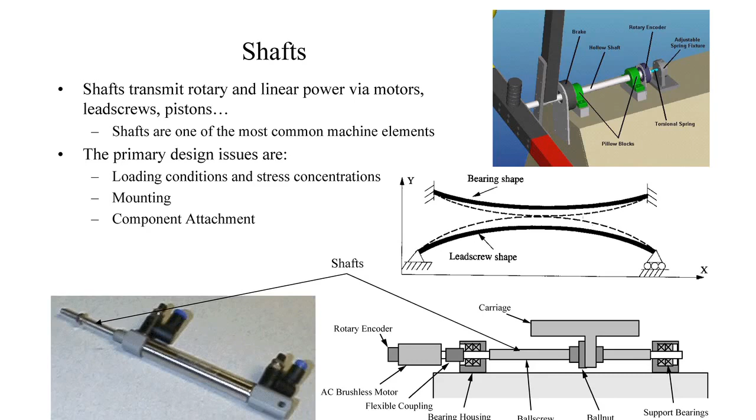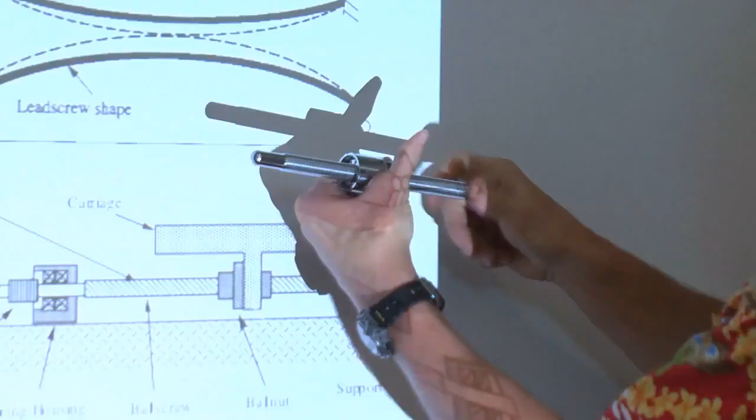Shafting includes smooth shafts, like for a bearing rail, and the shaft of the lead screw itself, but this is actually a roller screw. So basically, a shaft is generally something round. It can be octagonal, it can be square, but usually round because it fits through some sort of rotary motion bearing or linear motion bearing.

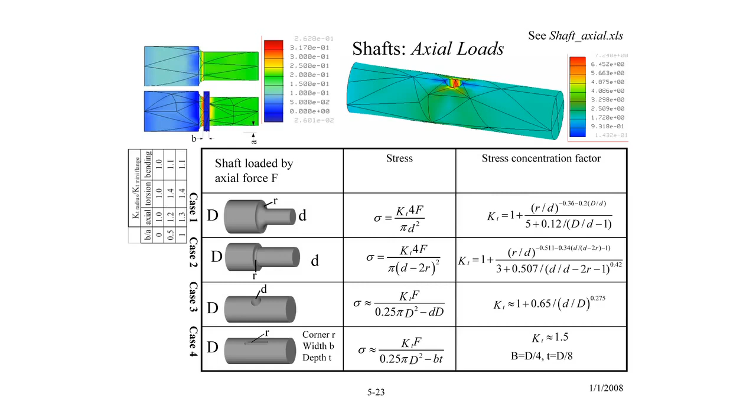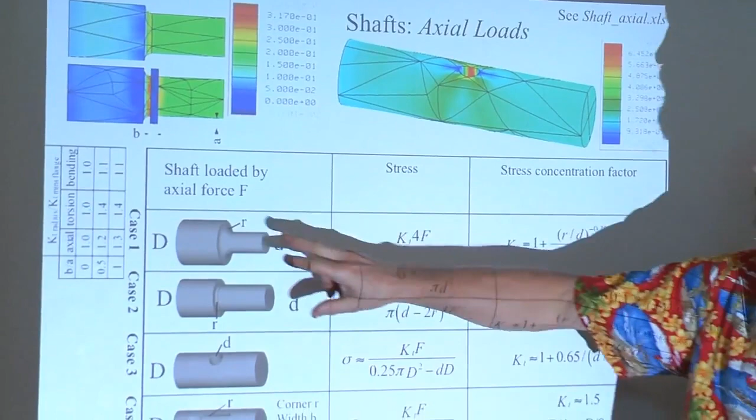Shafts are loaded in various ways: axially, torsionally, or in bending. Those are the three components. Shafts normally have different diameters along their length according to the different functions they're performing.

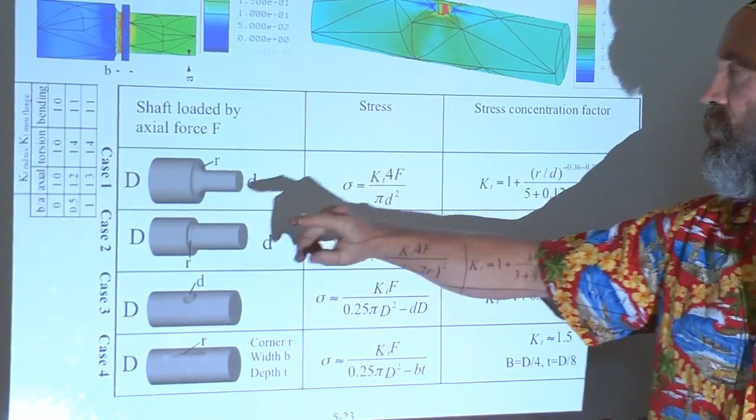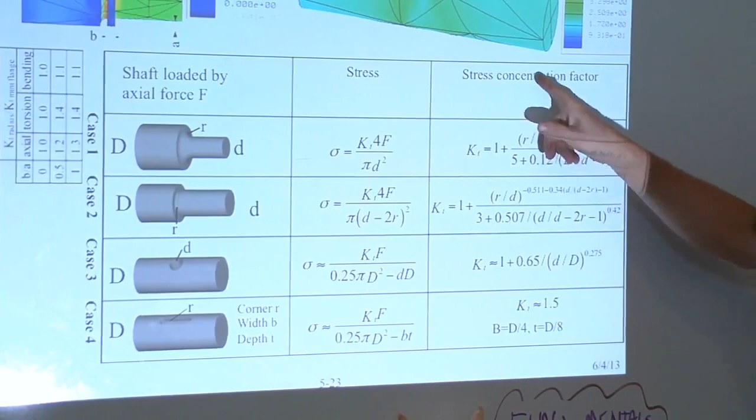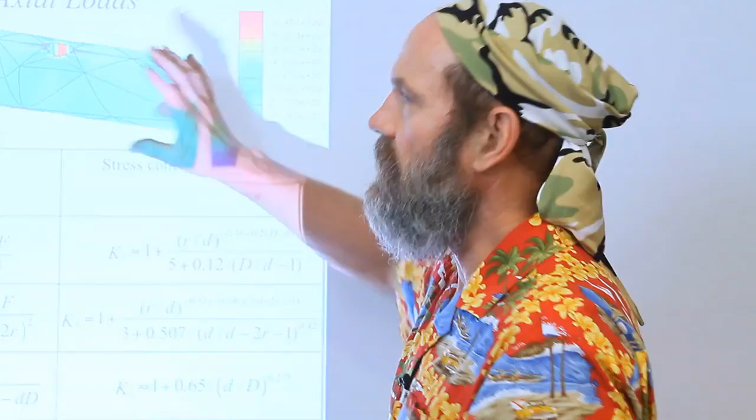It's the transition between diameters, or the inclusion of features like a hole for a pin or a keyway, that may seem very simple but can lead to very high stress concentrations. Remember, to design machines you should have a good class in stress analysis, mechanics, theory of elasticity, understanding how applying stresses to things causes them to break. But very importantly, be able to visualize: I'm putting stress into something, and the stress is flowing in the object, and it hits a hole. It's got to stop and go around the hole, and that's uncomfortable. That leads to stress concentrations.

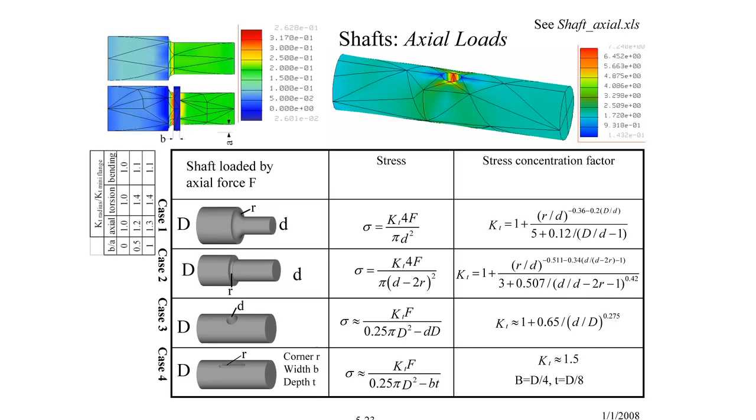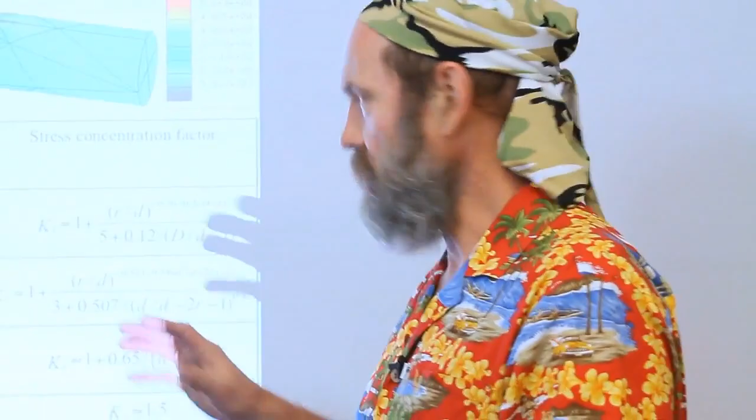This is the finite element analysis output. Here are some stress concentration factors you can write right into a spreadsheet that will allow you to do very rapid design comparisons without having to run and get a proper meshing to do the finite element analysis, because not all finite element analysis programs will be able to handle the transition from a large structure to a very, very fine structure and give you fine enough meshing to give good results.

In general, the key is smooth transitions. Avoid harsh changes, even in things like keyways. It may seem simple to make a keyway in a shaft, cutting it out with a milling cutter. You may think that's very fine, and in most cases it is.

But these sharp edges on the end here, and the sharp edge transition here, can lead to very high stress concentrations. You most typically like to use gentle, rounded edges, although it's very rare you ever see anybody do a rounded key because it's more expensive. But if you really want the ultimate minimum shaft diameter for maximum torque, you wouldn't use a key anyway. But if you were, you'd round that, and back at the end this should also be very gradual. This is called spooning of the keyway.

There are other shapes for transmitting torque with shafts: splines, trilobes. There's a lot of work that's been done over the years to get to shapes that are maximally good at transmitting torque while minimally disruptive in terms of causing stress concentrations.

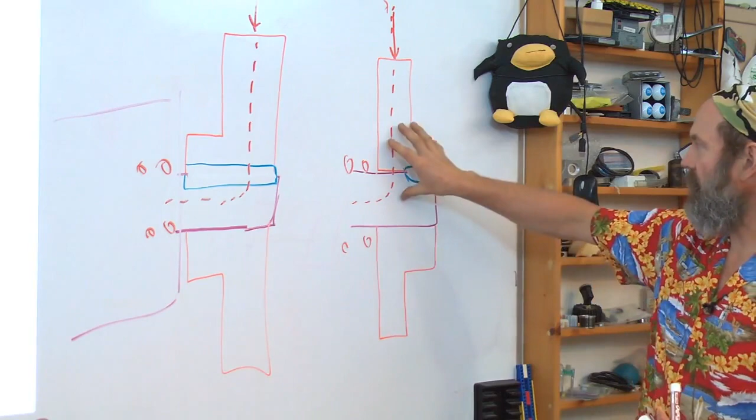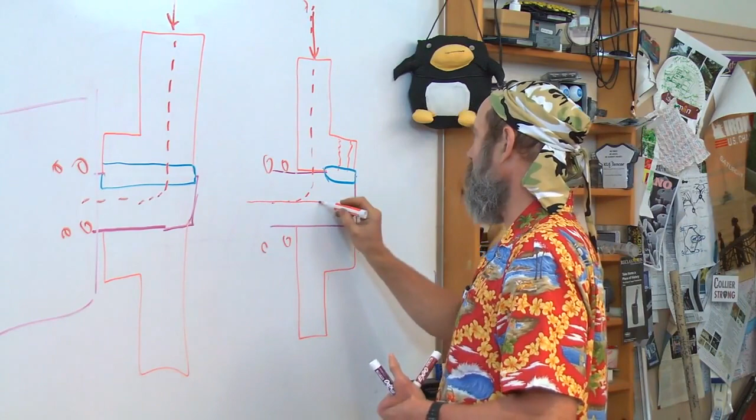Bearings in the shaft. Notice here the function of the shaft to bear the load, smooth path through the structural loop, no stress concentrating keyway features in it back here. The torque is transmitted through the shaft, then comes up through the keyway to be transmitted through the hub to twist whether this is a wheel or a gear.

So I've separated the design parts of the shaft that transmit the bending load from the wheel and the torsional load to the keyway. Back here they're reversed and mixed up, and the torsional load is coming through the shaft while it's being bent, and you get a more complex stress state to cause failure in the shaft.

Very subtle difference. So when you look at a motor output, the hub, you'll usually see the keyway goes all the way back, and it shouldn't. And if you're buying the motor, you should tell them you don't want it that way. This will give you a very robust design.

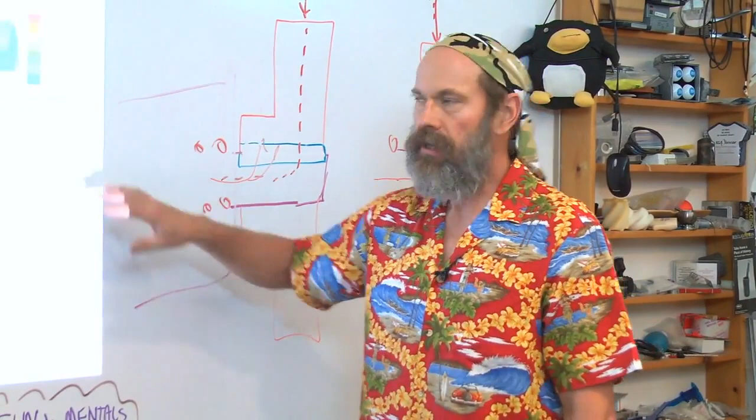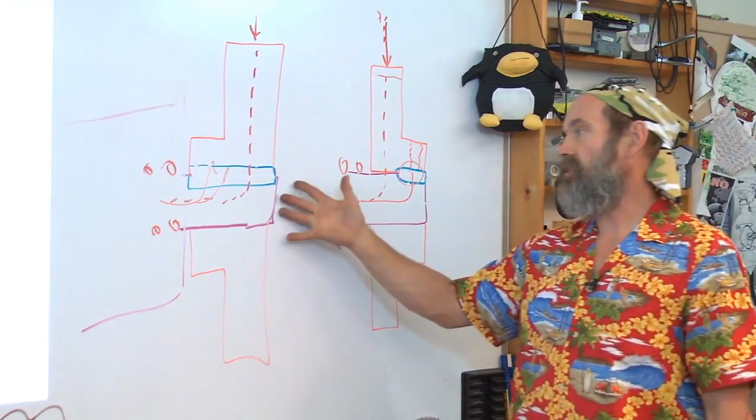So the moral of the story is it's not just that, oh look, I have sophisticated analysis tools. I can run finite elements. I can do the element design on this and show, okay, I have stresses. It's, dude, how do I do a design so I'm not going to have stresses in the first place? Because you may do the analysis and say, oh bummer, it's going to fail. All right, make it bigger, more powerful. Costs money. How do you minimize cost, maximize quality and robustness?

Mounting of the shafts. It's not just that you're going to load the shaft by external loads. When you mount the shaft, let's say this is a linear motion system. Oh, that's wonderful, it slides so nice. Oh, that's really good.

But if it was misaligned because you design the machine and then loads are applied to the machine, and everything has a finite stiffness - I loaded the machine, that's when I tighten this screw here and it bends this a little bit, and this plate looks really strong, but it's misaligned a little bit. Hey, look what happened.

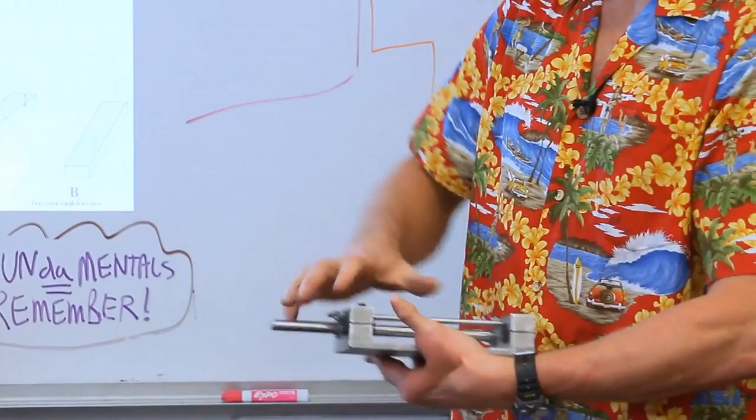What were nice bearings are now, ow, so that doesn't matter, I'll put a bigger motor on, I'll force it. They ain't gonna work so long. The bearings that support the shaft are misaligned.

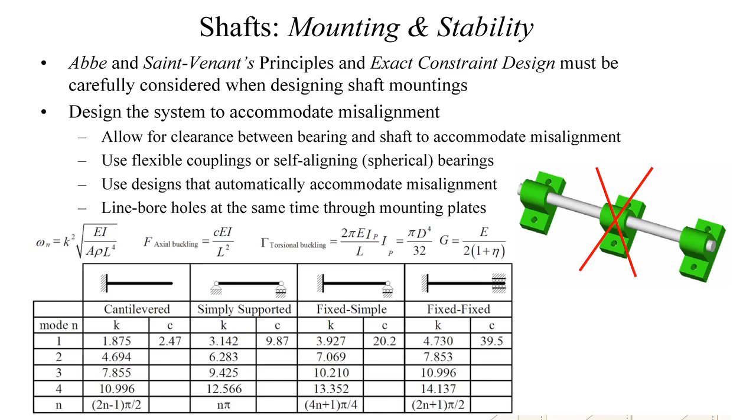Add another bearing in the middle. Use the shaft to keep the bottom from bending. No. So be careful of how many bearings, misalignment of bearings, and you can calculate all this. It's based on clearances and the very simple geometry. You can write your own spreadsheet for this. I bet there's even one that exists in the collection.

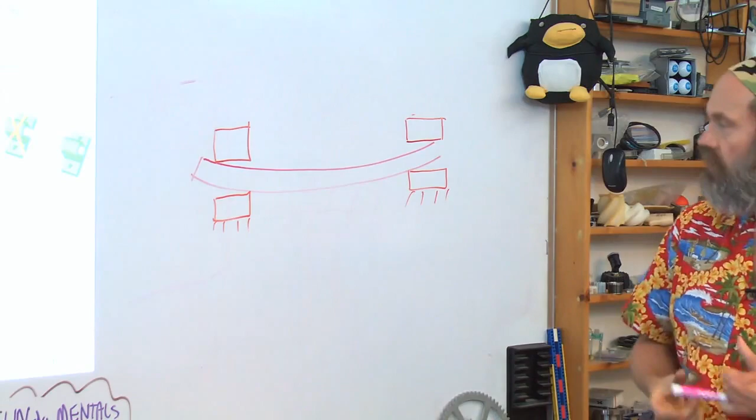The shaft will have some shape because nothing's perfect. How much clearance between the bearings and the shaft is needed such that I do not over-constrain the shaft? Will the shaft, when it bends, cause stress risers on the bearings, where I had calculated the size and strength of my bearings, assuming that I had even pressure across the bearing?

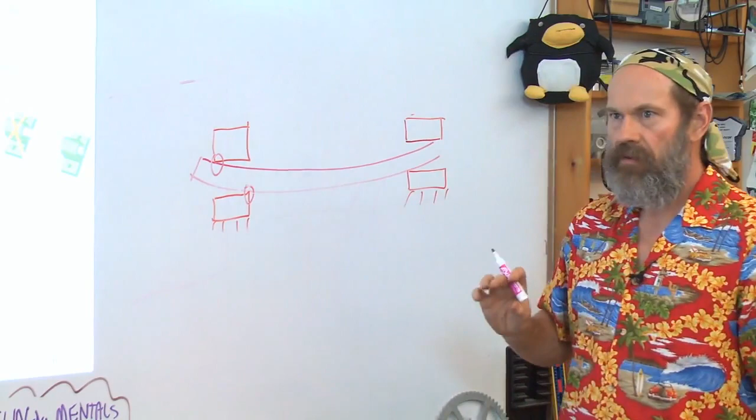Well, it starts to wear here and here. 1 over ouch equals ah. Maybe then the bearings have to be in a spherical seat such that they will rotate and always be aligned with the shaft. Huh, how would that work? I wonder if someone's thought of that before. That's called a self-aligning bearing.

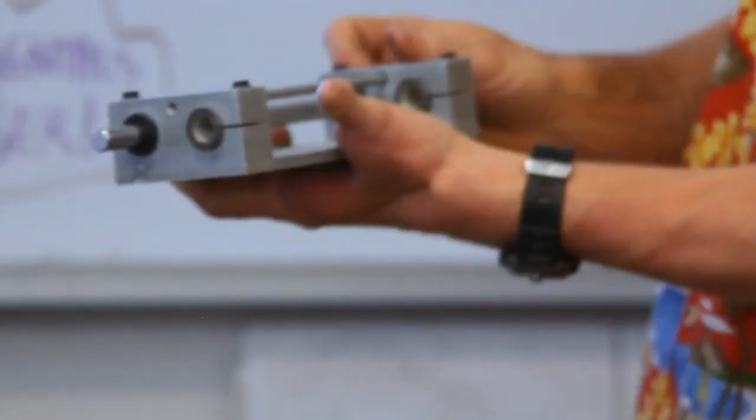Ah, hey, check it out. Why would you ever use these versus these? Some places you want these, some places you want to have just one. And notice it's about 2 shaft diameters, and it will actually support things reasonably well, whereas the self-aligning one gives you way too much wiggle.

But together, 2 self-aligning ones give you all the stiffness you need. Everything has a place, everything has a niche. Your goal is to identify what is the place and niche for things.

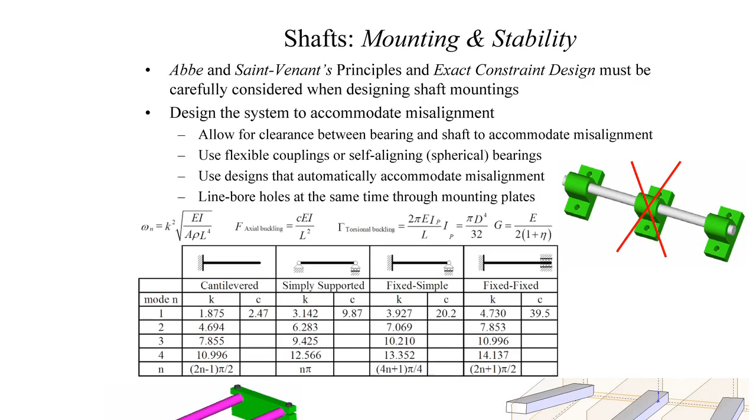Now, this table here calculates for the different types of shaft supports: cantilevered, simply supported, fixed simple, or fixed fixed, which is very difficult to get, how strong the shaft is against buckling. If I push too hard, will it buckle and break?

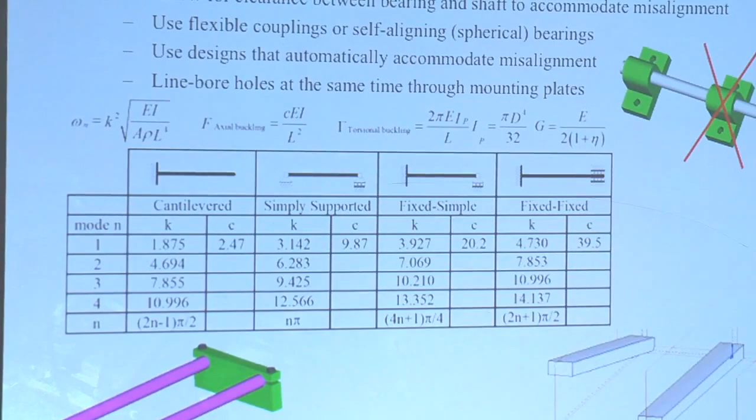I'm not going to use the pen because I'll hurt myself with that. I have just the thing. No, we're not going to use that one, I don't want to break, those are too soft. I guess we will use this guy, this is a piece of plastic. And when I'm pushing on it, it's very strong, but this, if it's off a little bit, that was a buckling instability of sliding away.

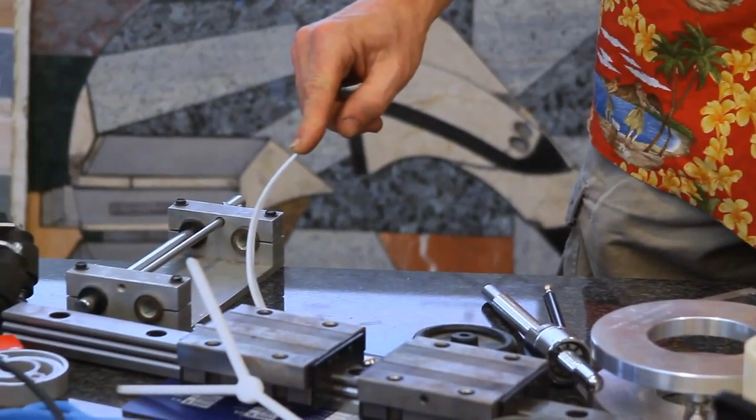Aha, I know how we can cut through this problem. Okay, shaft, pushing on it, oh that's very nice. Push too hard, doink, bends. That's buckling. I let go, it comes back. That's called elastic buckling. You push too hard on something, and...

That's not very repeatable. Boink. That's an inelastic buckling, runs away, instability. It's not just for pushing on it with a force. If I was pushing on this with a force and a shaft in compression, and it was spinning, I can also have a rotational buckling where it starts making an awful noise. Because the slightest little bit of non-straightness, as it starts spinning, the center of mass of the shaft is now off from the center of stiffness, and that's when you get a rotational instability.

So the world of shafts also includes dynamic analysis - very, very important. Alignment of shafts. Shafts can be misaligned this way - that's vertical parallelism. Shafts can be misaligned that way - that's horizontal parallelism, if you're using multiple shafts in your structure.

How do you attach stuff to shafts? Well, we went over the use of keyways, the use of shapes. Do not ever, ever, ever - unless you enjoy paying me exorbitant consulting rates so I can fix your problem and then go scuba diving or skiing more - use a set screw component. Here's the hub, and here's the set screw, whether you're using a set screw to push into the shaft and transmit torque through it.

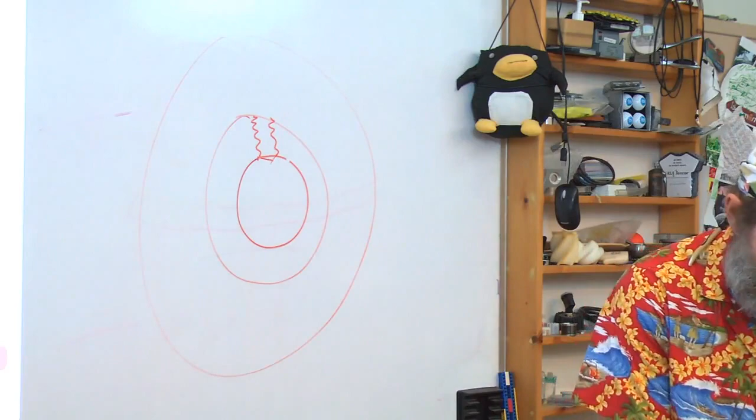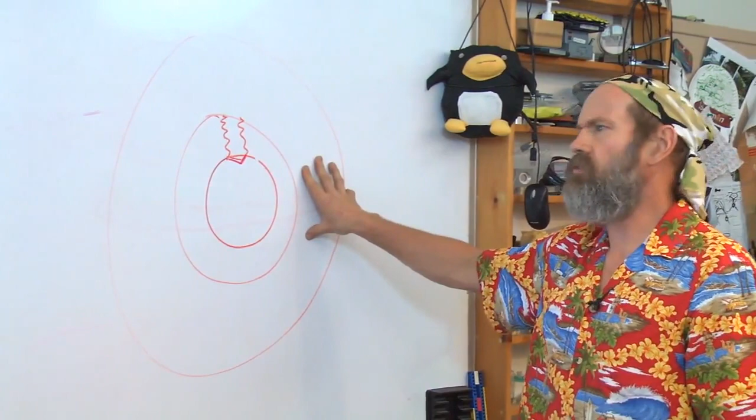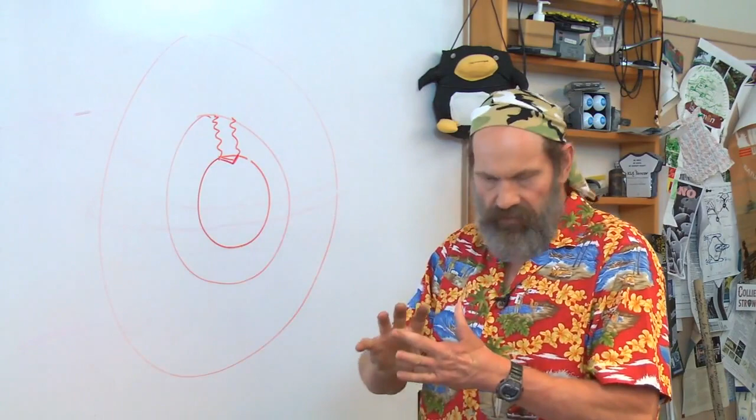So, yeah, but I can buy stuff out of catalogs like this. What do you mean don't do that? Again, if you're designing a cute little machine to do a little demo, that's fine. But on a production machine, what happens is this cup here at the end of the set screw, as you have variations in torque, it starts to work its way loose, and you start to wear, and eventually it will spin out and the wheel will spin free. The purpose of a set screw should only be to keep a key engaged so it doesn't migrate out.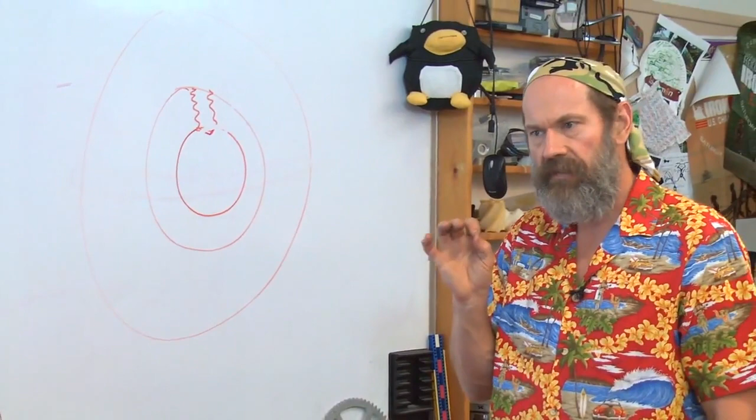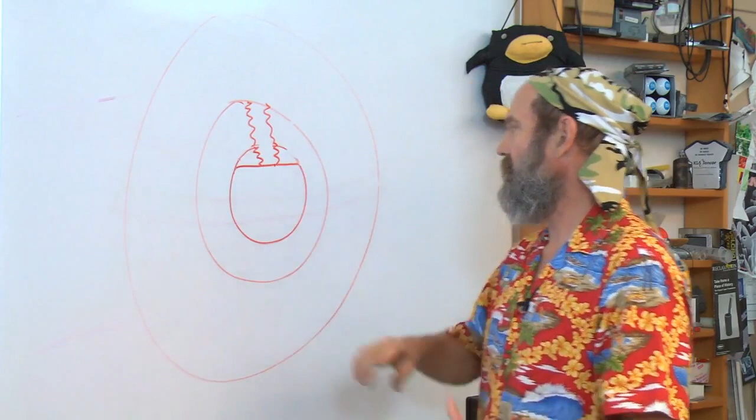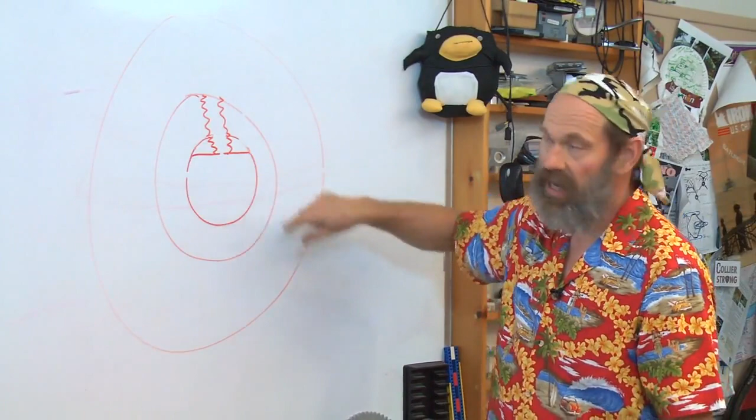Some of the very small components you have in small shafts will sometimes have a set screw that pushes on a flat. And that is a rather lame attempt to try and enable torque transmission, because the contact point is here at a much smaller radius than the radius of the shaft. The idea is that this acts like a wedge, but the problem is the mechanical advantage is in the wrong direction.

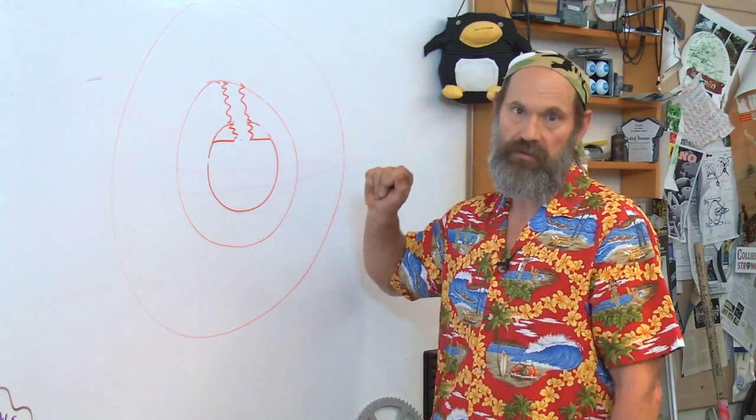So a little bit of torque creates a huge force level on the set screw against the flat, which then more rapidly creates this little wear problem. That wear problem generally leads to early failure here and this thing spinning. So the only time you're justified in using a set screw to a shaft for, quote, torque transmission is never. The only time you would use it is if you're not transmitting torque - all you're doing is going along for the ride, like holding an encoder wheel in place, so there is no load on it other than just the inertia of the wheel. You need to have a positive mechanical engagement.

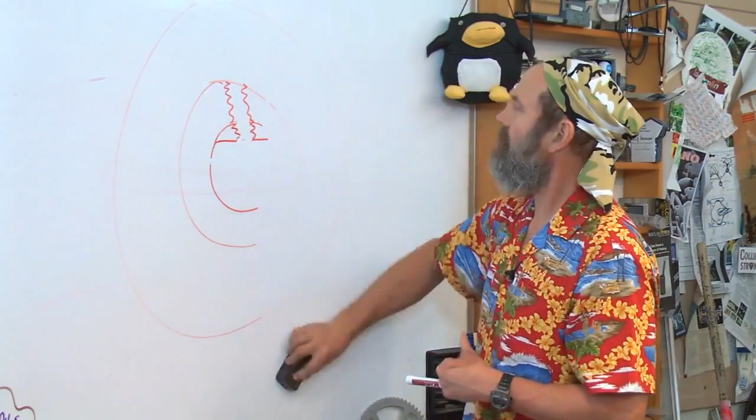Now, one of the opportunities that I've seen that hasn't been taken up on yet, that someone may want to think of one day, is for small motors. The shaft comes out - how do you attach, for example, a pulley to the shaft of a very small motor? Well, there's all kinds of very interesting taper lock flanges for big stuff. Or can there be taper lock flanges for little stuff? A taper lock flange being...

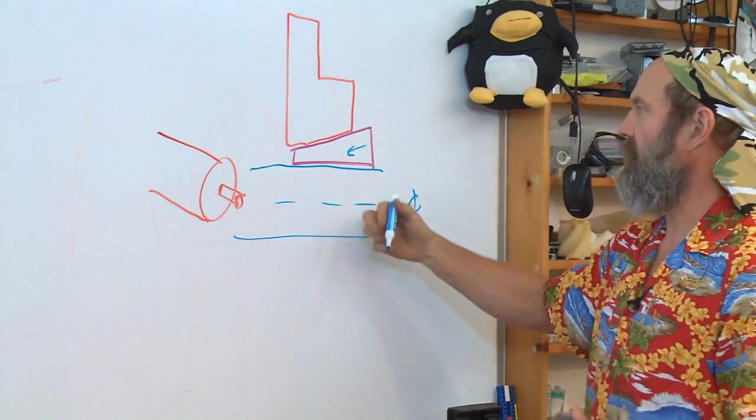You have a taper, another taper, and then the shaft. As this taper is driven in, it segments the taper around, squeezes the shaft and squeezes the pulley, and locks it in place. This is used on big, heavy machinery, and you'll see this sometimes for smaller machinery, but it takes an extra part.

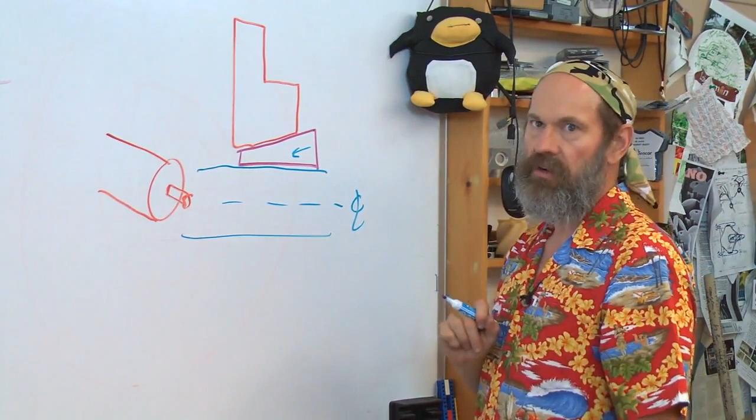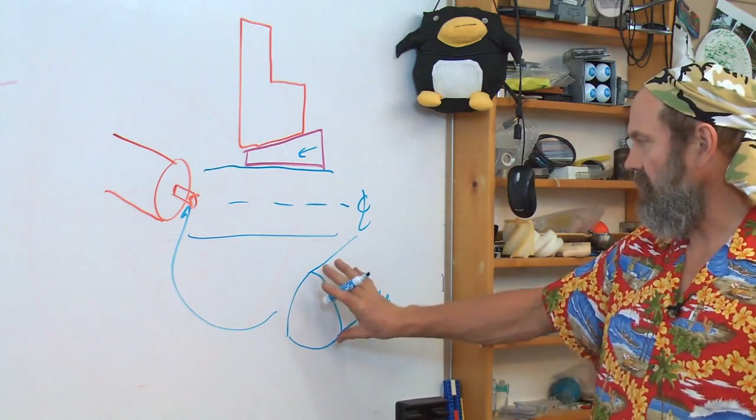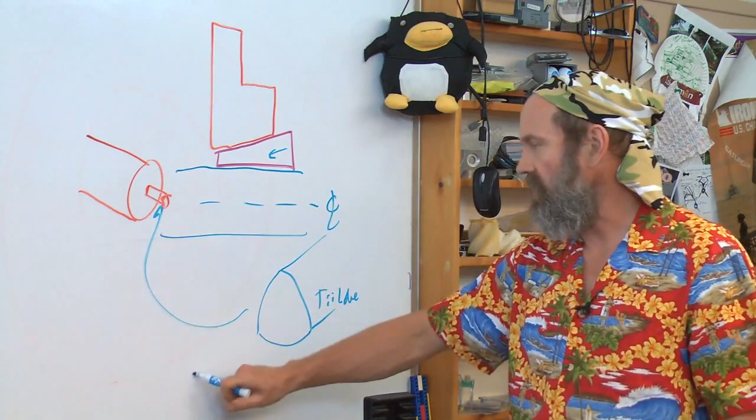Remember this shape we saw earlier, the trilobe? Why is there not a standard for little motors? Trilobes are often used in many types of shafts to have fantastic mechanical engagement - it's like using a socket wrench. Why are these not used on little motors? If I was designing a machine and I used hundreds of thousands, maybe tens of thousands of little motors, maybe I would just take the little motor and use that motor with a grinding wheel, and I would custom grind little trilobes in all my shafts.

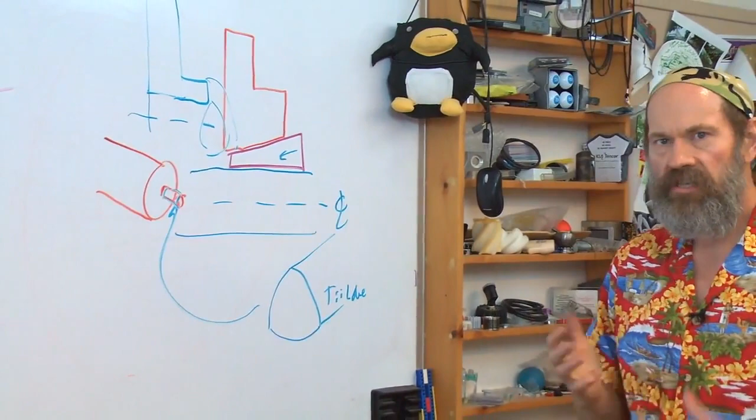And then put the mating trilobe feature in the hub of my pulley. So this shape here would be trilobed, and I could broach that in. This is the kind of thinking you have to go through: shaft, torque, method of transmitting torque - torque equals force times radius. How do I get a force, transmit a radius, minimize stress, and not cause fretting or wear?

This is the menu of thinking you have to go through in your head. Very, very critical. When you're done designing it, do basic analysis - yes, use your finite element analysis to focus in and really check those details. Because if you're going to send off a product that you're making hundreds of thousands or millions of, and you don't get this one little pulley right, and it starts to fall off the shaft, the rest of your brilliant, beautiful machine is totally worthless. Every one of them are going to come right back to you.

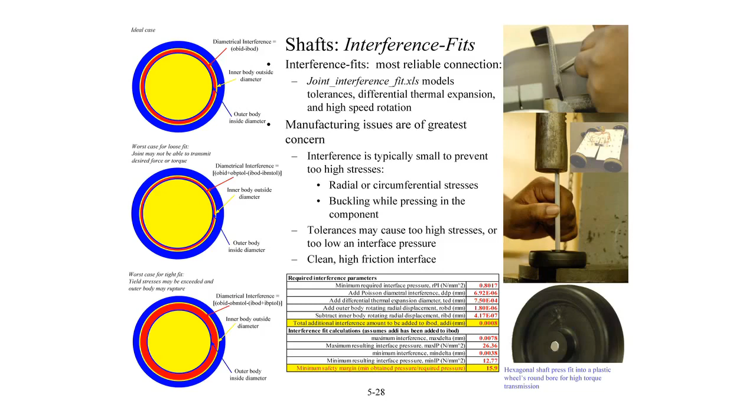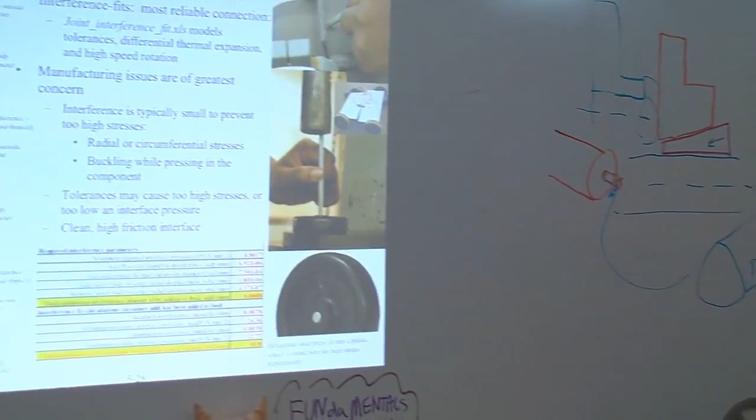Another way of attaching things to a shaft is by using a press fit. The press fit calculations are very basic, straightforward. They're in the text. There's a nice design spreadsheet, pretty color pictures. And the key to a press fit is when you press one part into another, how much press?

If here is a wheel, and I'm going to press fit a shaft into the wheel, what is this amount, this interference delta for the shaft in the hole of the wheel? If it's too big, do I end up failing the material in the wheel and causing problems? If it's too small, I'm not pressing hard enough and I will spin.

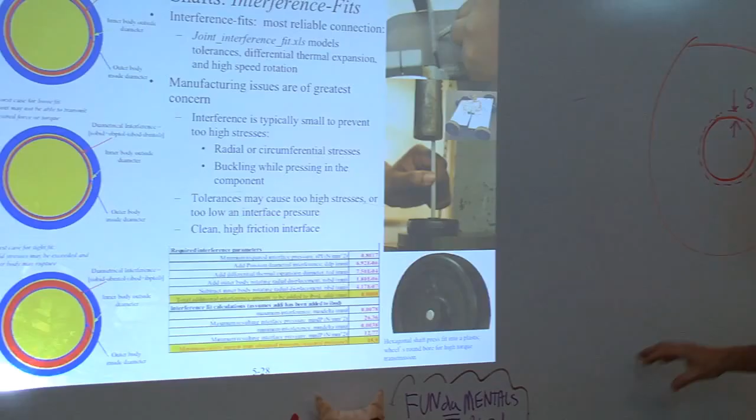These are pictures I drew to show the different conditions for when the shaft is too big or too small for the wheel, based on when the wheel is spinning, the wheel expands due to centrifugal forces. So it may look just fine the way it is now, but when it starts spinning, you lose the torque transmission. You may take this wheel, maybe an aluminum hub on a steel shaft, and everything is fantastic, no problem, beautiful.

You ship this product to the desert. Maybe this is controlling a heliostat for tracking the sun. And it gets really hot, as it happens in the desert sometimes on sunny days when you want to generate electricity. And there's a wind load, and the heliostat doesn't work because the torque was too much for the press fit, because the aluminum expanded more than the steel.

You want to shrink something on, so you want to heat up your aluminum so it expands, place it over the shaft, and then let it cool down. You want to get it off after you've done this. How do you do these things?

Do you think ahead to, here's the shaft, and here is the wheel that was pressed on or shrunk on, and now I got to get it off. And if this expands more than that, do I take a torch and heat this? Yeah, sometimes that's done. Have I thought ahead that, well, the shaft could have been hollow, and that really would not affect the stress state at all?

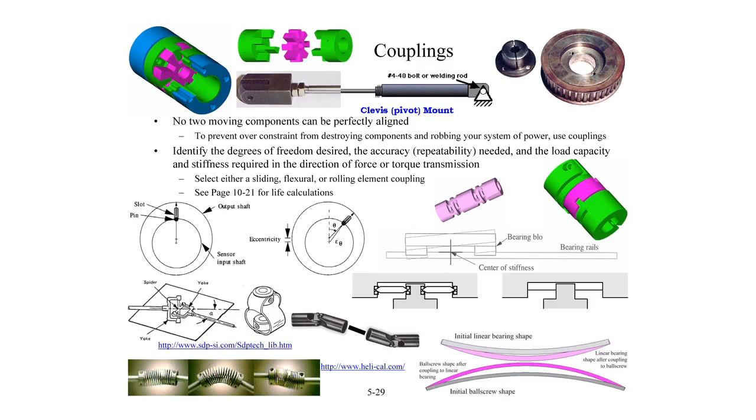Next, let's talk about couplings. The press fit is a way of coupling, or the key is a way of coupling the shaft to the wheel, but that's assuming you have a rigid connection between the two. That's what you're going for. But what about if I want to have some misalignment?

So, for example, I want to have a shaft that can push on something but allow for misalignment, this kind of ball joint, for example, used in these hexapods.

These shafts here are coupled to the base, and you see how that rotates. If this was a shaft, where this shaft was driving power to this one, that would be a universal joint. If it's not, this just allows the full degree of freedom I want when I change the length of this leg. This is a coupling that's coupling this shaft to this structure, or a coupling that would be coupling this shaft to another shaft.

If you look under a car or a truck, it's actually easier to see the drive shaft with the universal joint couplings. There's many different kinds of couplings, and again, it boils down to what's the function of the coupling you want to achieve. This type of joint here is simply just a spherical joint, or some people would call it a ball and socket joint.

It has 3 degrees of freedom: rotation, and one angle and a second angle, or 3 angular motions. Remember back to topic 4 on linkages. This type of joint here is called a universal joint.

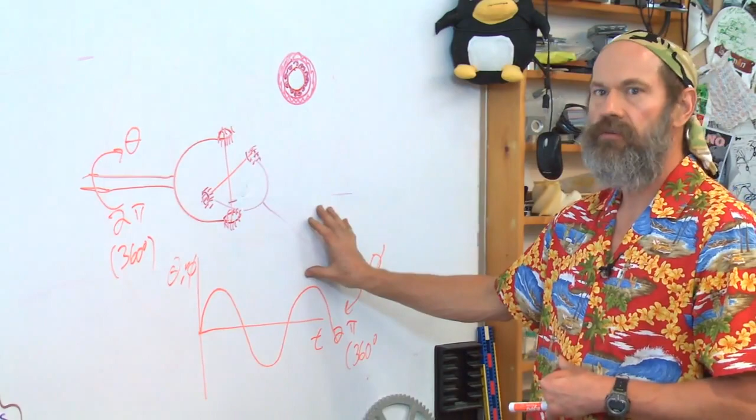That's a problem. Is it? Well, one, it's going to make some sound. But the real issue is I want constant RPM on my motor to not make my vehicle lurching.

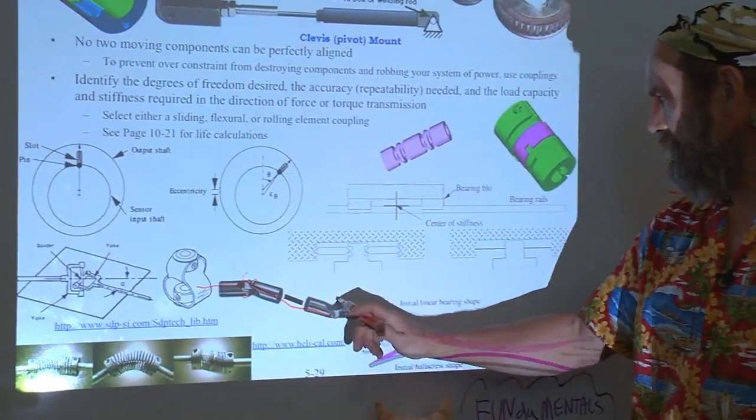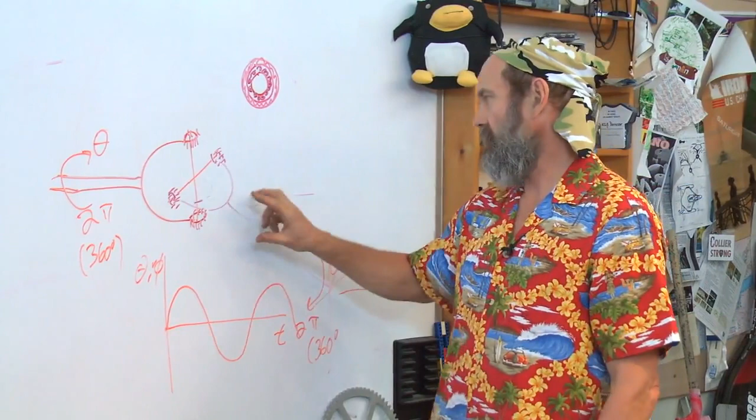So what happens is drive shafts will have one universal joint or two universal joints, and you phase this so the speed up caused by this one is canceled by the slow down caused by that one. You run them exactly out of phase such that the input and output shafts have exactly the same speed. The drive shaft in the middle ends up not going the same speed, but that kinematics is canceled out by the use of two joints out of phase.

What happens if I only have one joint? That's a problem. Why would I only have one joint? Well, maybe I've got a front wheel drive car where I don't have a lot of room. Maybe I want to have my transmission right off to the wheel being driven. What would I do then?

Well, in the mid-1920s, a guy invented what's called the constant velocity joint. Go look up who that person was. And why did the invention kind of hang out for the next 40 years or so? Well, about 20 years was the next part of the invention, another 20 years later before it became commonplace.

And that's the CV joint. How can I make a universal joint that has constant velocity? How would I do that? Where would I start as an inventor, as a designer? I kind of got to start with something that's rotationally symmetric through all ranges of motion.

How would I now couple torque through this simple spherical joint to make it a spherical universal joint? How would I make a universal joint using a true sphere in rolling motion such that I get these motions, but I transmit a torque? So look up CV joints and the history of CV joints. They're fantastically interesting.

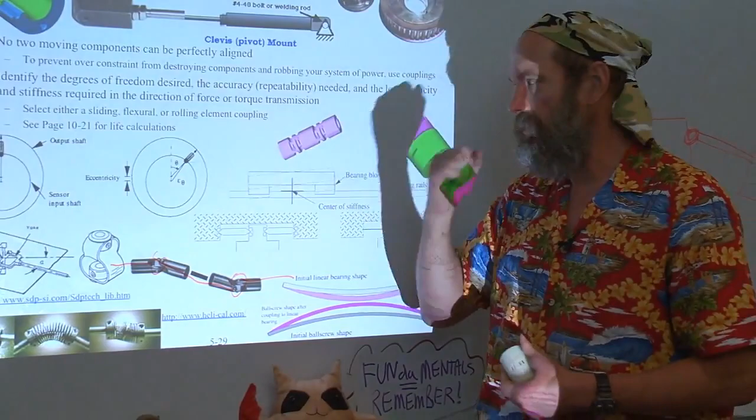What about other types of coupling? Servo couplings, for example. A servo coupling is a way to take the output torque from a motor and couple it into, for example, a ball screw. How would I take my roller screw here, attach a motor to it, and spin it, and allow for misalignment between the two?

Because I just said earlier, you have to be very careful of misalignments. Screw shaft, supported by bearings, motor, shaft. And I don't want to have this spaced far enough apart such that I could use two universal joints. That's no good.

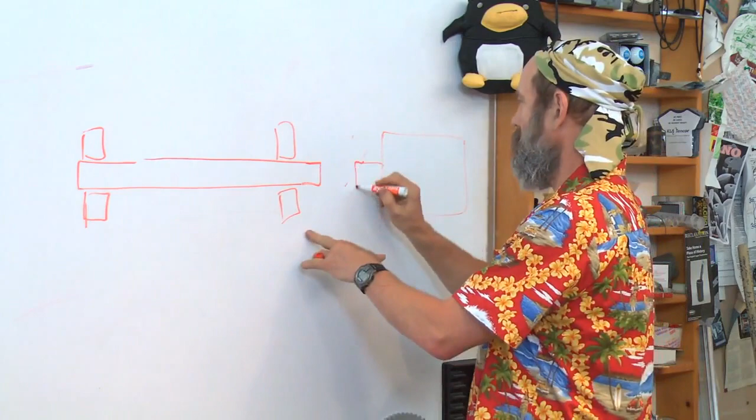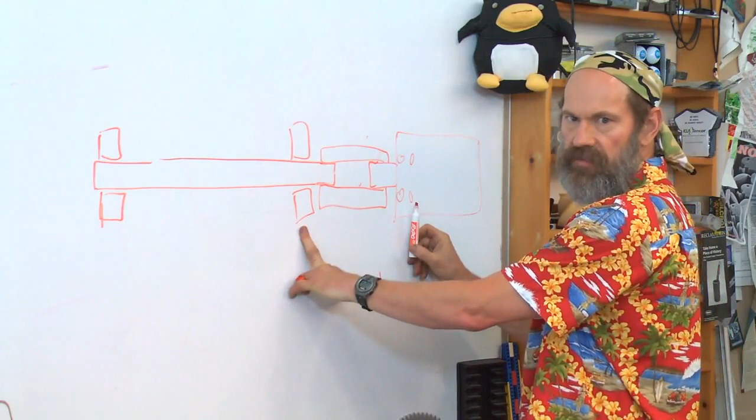How do I couple these in a short space in a machine? But I got to be careful because the function of these bearings is to hold this shaft rigid. But there's bearings in here in the machine that if I just put a rigid coupling between these two, these bearings and these bearings are going to fight each other. Remember St. Venant. I need something that will transmit torque but allow for some misalignment and not get me too crazy on this nonlinear speed up, speed down effect we just talked about.

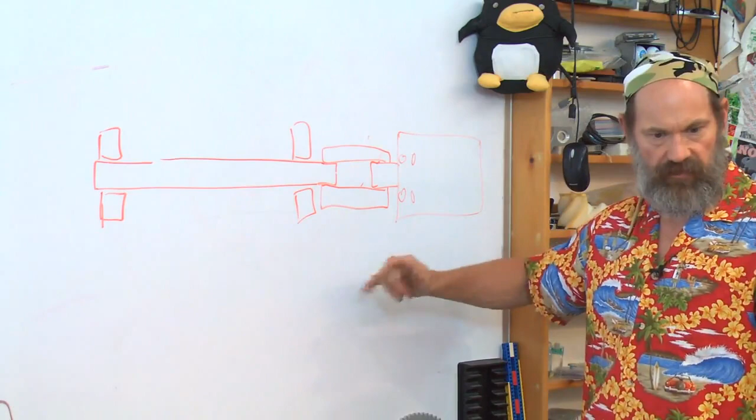Well, it turns out that this is one of the most common design challenges, not so much in name because it's done very, very often and handled very, very easily. But it's one of the most common design scenarios you're going to find in designing equipment. And there are a number of different types of couplings that can be used.

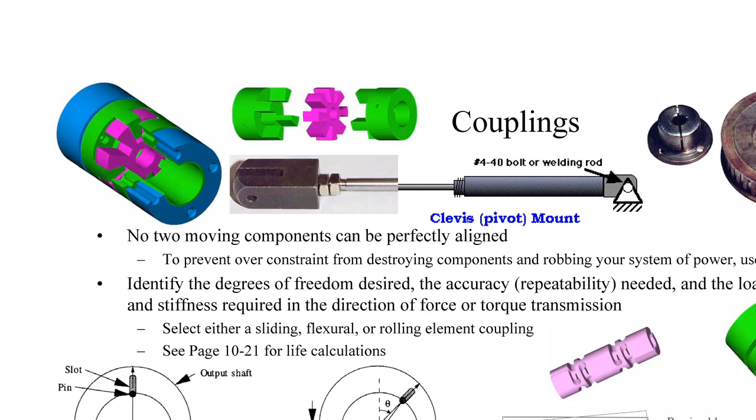This, for example, is a spider coupling. And a spider coupling works, typically you'll have 4 teeth. This actually is a small one, so it's only half a spider. If you have 4 teeth on the input, 4 teeth on the output, the input and output are coupled through this 8-legged spider.

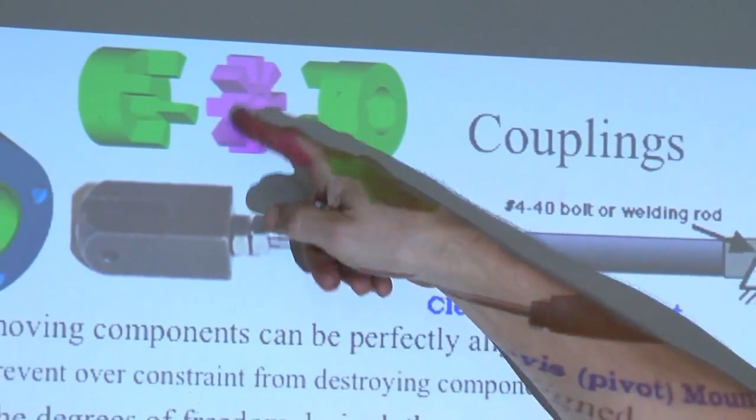So that goes together like this. The input teeth. The spider is a polymer, and typically the shape of these teeth, they're slightly crowned on this surface here. So that's when the mate comes in and is pushed in, and I will push it all the way in.

This is tight. You see, why is it so tight? How's that a coupling? It's made reasonably tight so there won't be any backlash. But then this has, see, it can allow for some misalignment between the shafts.

The problem is, although this works, you got to make sure you don't say, well, I got a coupling, I don't need to worry about misalignment. All couplings have finite misalignment capability, and typically the misalignment that they allow causes a radial load on the shaft. That's your parasitic load from the coupling. And that has to be part of your design analysis for rational selection of the tolerancing of the alignment between the shafts.

Such that ideally you put a coupling in there, but it doesn't do anything—it could be a rigid coupling. You want it such that the misalignment capability offered by the coupling is really just an insurance policy.

What about other types of couplings, like tooth couplings? Here we have some 3D printed teeth, and you might say, why can't I just engage teeth like this and allow for some misalignment? But see how I'm getting a little bit of backlash? Also notice with a tooth coupling, as I twist, see the way it wants to come apart? You might say, fine, don't have an angle in the teeth, just make them straight. But then when you have straight teeth, you will always have backlash.

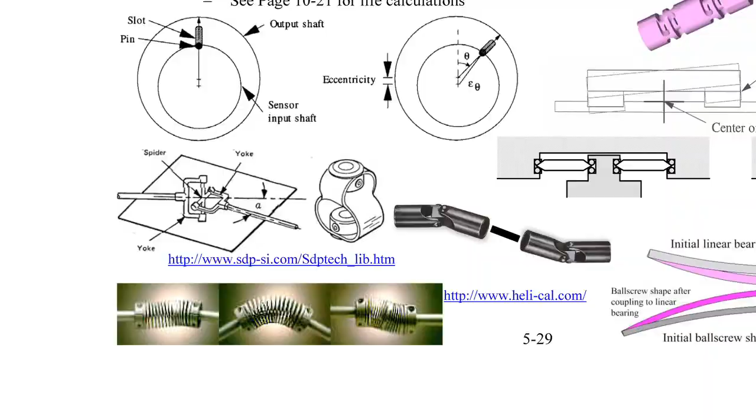Then you have flexible couplings, helical couplings, plate-type couplings, chain-type couplings, vast quantities of different kinds of couplings, all designed to try and make them as stiff as possible torsionally, because that's the functional requirement, transmit torque, but as compliant as possible in every degree of freedom other than the torsional mode. And that is a real challenge that is almost solved. Maybe you'll be the one that solves it exactly.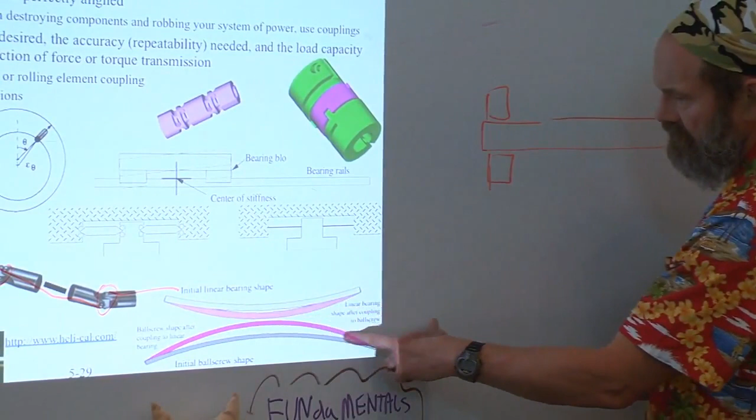The next thing on couplings, remember this is not just for torsional coupling. Here, for example, is the shape of a lead screw, or a ball screw, or any kind of screw. And here is the shape of a linear bearing carriage, the rails for it. You say, they're not curved, they're supposed to be straight. Yeah, but remember, nothing is ever perfect. How do you make it such that you can have the nut coupled to the linear motion carriage such that as the screw turns and the nut invariably wobbles about, you can couple it to your linear motion carriage to move and not cause so much bouncing?

Remember, in fundamentals, the concept of the center of stiffness and where you want to mount the coupling is often as important as the coupling itself. So make sure you go back to topic 3 and look up center of stiffness and where things need to mount to cause minimal tilt, because if you have tilt, now you have angular errors amplified by distance, or the whole concept of an Abbe offset.

If you give a mouse a cookie, he'll want a glass of milk, et cetera, et cetera, et cetera. Design your machine to minimize the need of analysis and problem solving in the first place. You'll have plenty of opportunity for solving problems. No need to make extra ones.

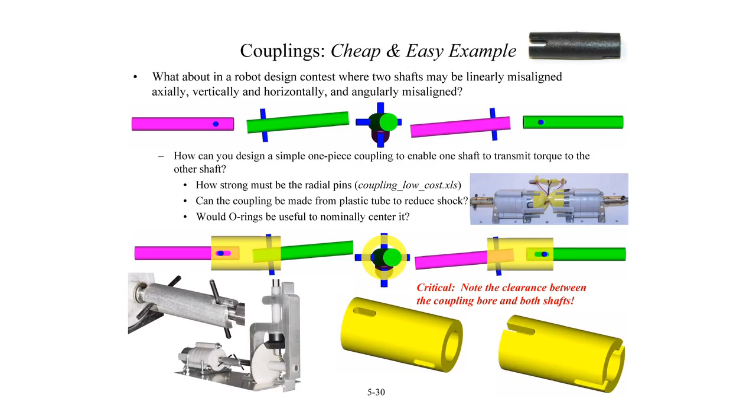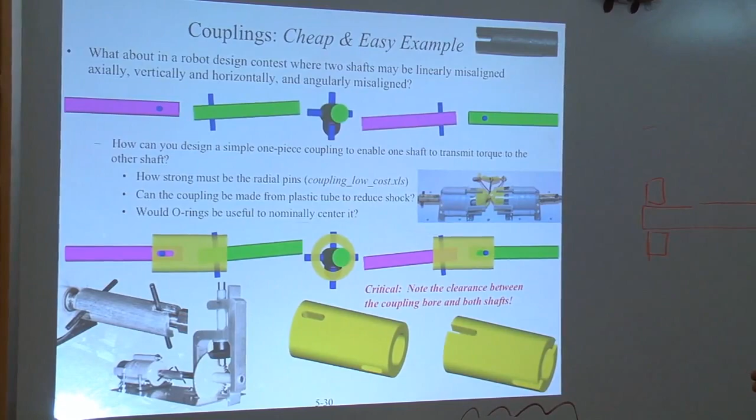Now, if you look at shade tree engineering, so to speak, and making things fast and easy, a pin-type coupling, pin in a slot, can be made to act like a universal joint. It can also be made, because of the pin in the slot, to accommodate axial motion. And then now you have to worry about, as the pin goes through the slot, what is the surface or the contact stress between the round pin and the edge of the slot, given the torque that's being transmitted.

But you should never be afraid of, if you're in a short use case, for example one of these design contests, and you need to pack something in a small space, designing your own coupling. Just look at the motions that you need to require, follow the flow of forces. You have the tools now to think about them, calculate contact stresses between the pins and the slots. That's actually coming up in topic 9, but I'm sure you've jumped ahead and read it already. Do not be afraid of designing your own couplings. It's very straightforward, just don't forget the details.